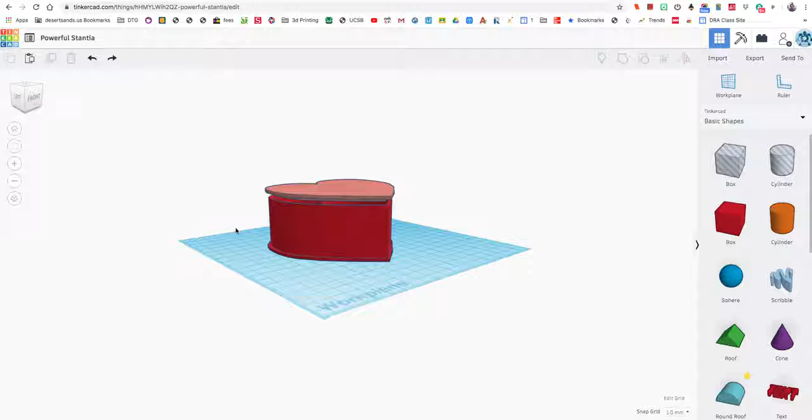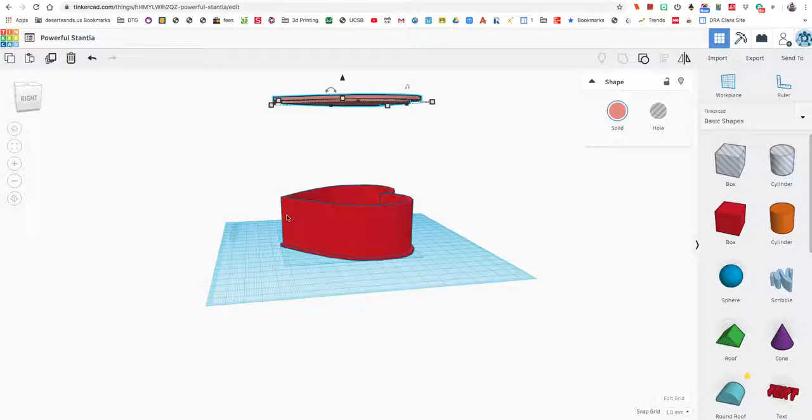This is going to be an advanced tutorial, so get ready to get your mind blown. This is advanced, don't even try it, you might start crying. But for those brave enough, here's what we're going to do: we're going to cut this box at an angle and then angle the lid as well, so the box at the end is still a box, but more interesting than just going straight up. You'll see what I mean in a bit. But to do this requires understanding negative space and angles.

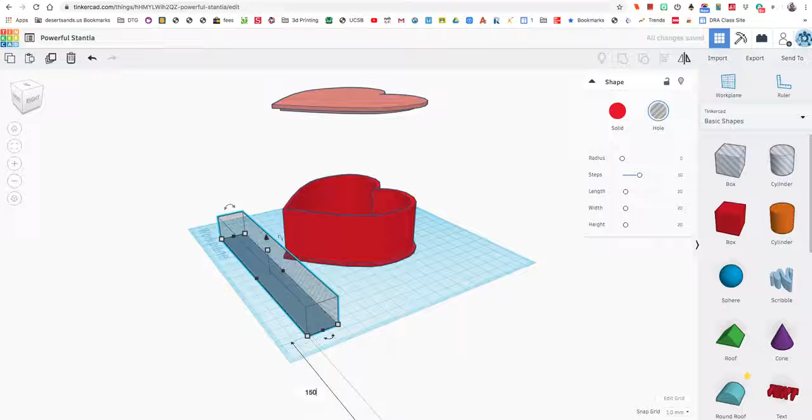First thing I'm going to do is change this to about 150 by 150. And why so much? Because I wanted to cover the spacing, yet it didn't work — I went wrong. I'm going to click here for 150. All right, and then this one, let's just go about 50.

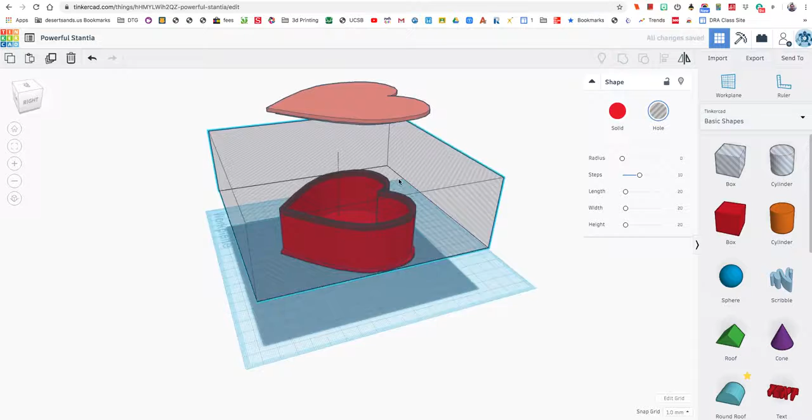So what I want to do is create an angle here. I'm going to do that by raising this, let's say here. And I'm going to move the lid over here to the right. Here's where it gets tricky.

You click on this, and this is what I want to play with, because this is going to tilt it left and right. So if you're looking at it this way, you're barely going to see this. You want to make sure you're looking at the side of the box. Now I'm going to zoom out a little so I can show you what I'm talking about.

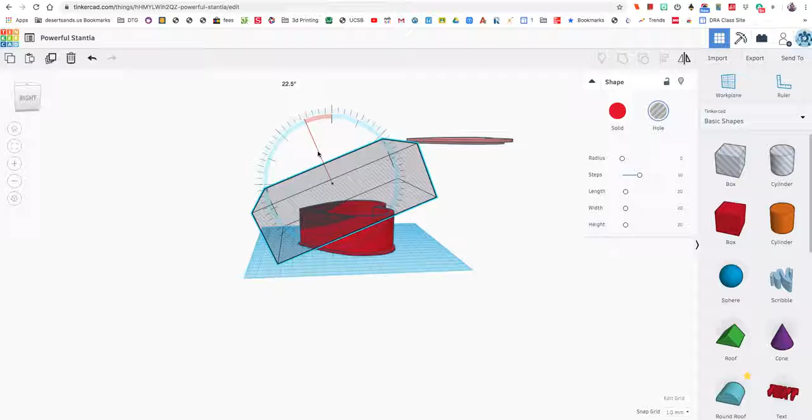Now if I just move this over, it goes 22.5 degrees — not exactly what I'm looking for in terms of the angle. See how it just cuts part of it off? And if I move it back a little, yeah, the box goes right about there. I don't like the angle. Let's just keep it there.

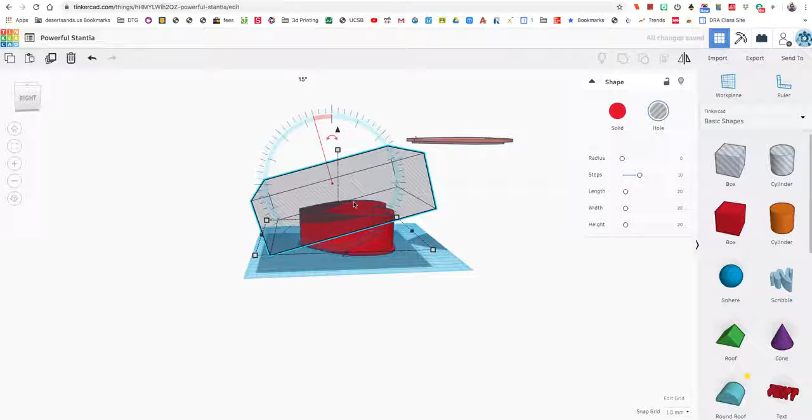So what I'm going to do is change this by putting 15. And why 15 degrees? Because I was playing with this earlier and I liked the way 15 degrees looked here. So I'm going to go with 15.

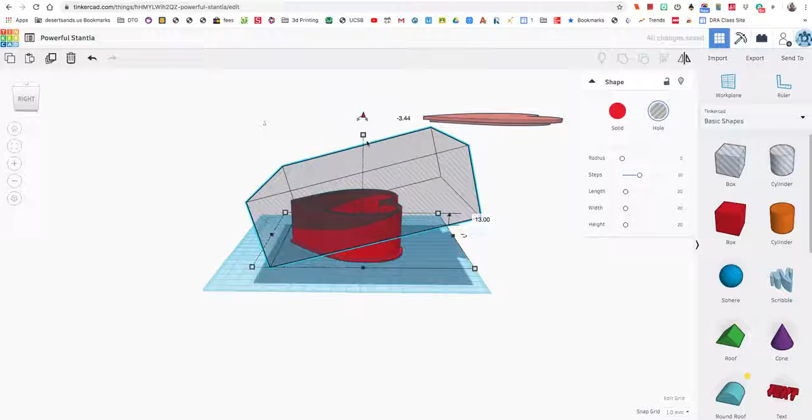At this point it's not going all the way back. Let me show you what I'm talking about. I want this gray area to be right here, because that's what's going to get erased. So to make sure I get that, I'm going to lower this just a little bit more. And there — now I have the very back of the box at an angle and the front of the box at an angle. Okay, so there you go.

It looks good. I'm going to just move this over here. Again, everything looks good — it's going to cut the top layer. Before I group these two, here's what I'm going to do.

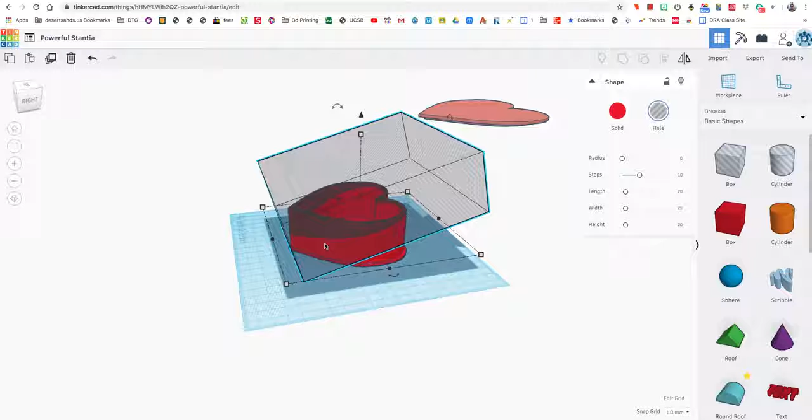I'm going to create a duplicate of the box, and then just move this over a little bit over here. Okay, I'm going to group these two. And now I have this slightly cooler version of the same box.

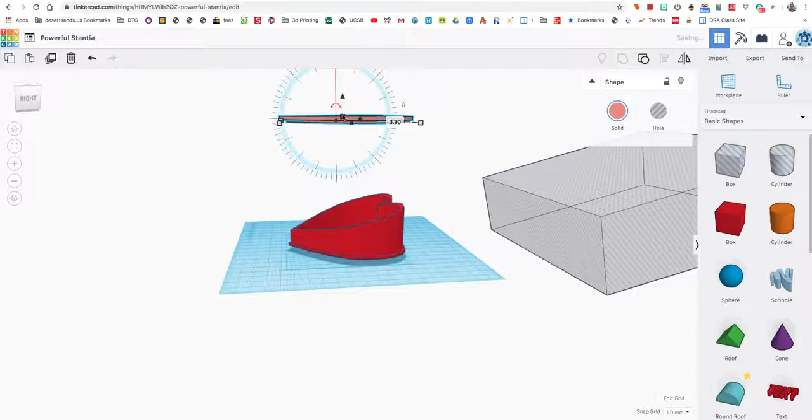Now here's the next part, and this is the part that confuses some people. Right now the lid is in two parts. I could just click on that, change that to 15, and there you go. But can anyone see what the problem is going to be when I do this?

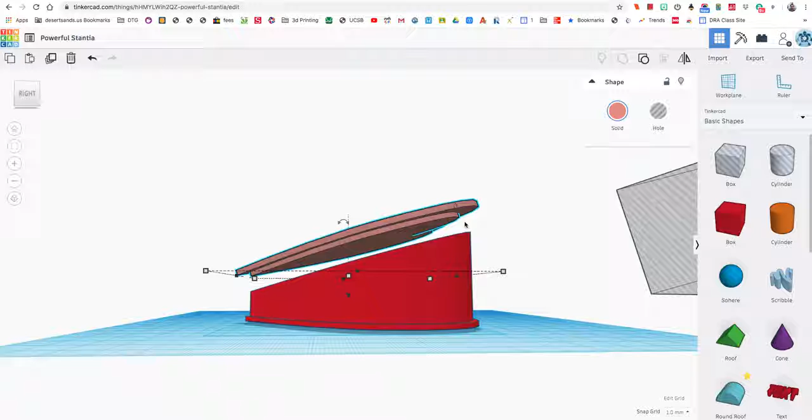It's really hard to see, but if you notice, this bottom part is going at an angle as well as this one, which means it may not close correctly. So what I want to do is guarantee that it closes correctly by making sure this angle here is going straight down.

And this is the part that makes it a little more difficult, a little more advanced. So let's move this back up. The first thing I'm going to do is separate this, so I'm going to ungroup. There it is, and the bottom is red and the top is pinkish.

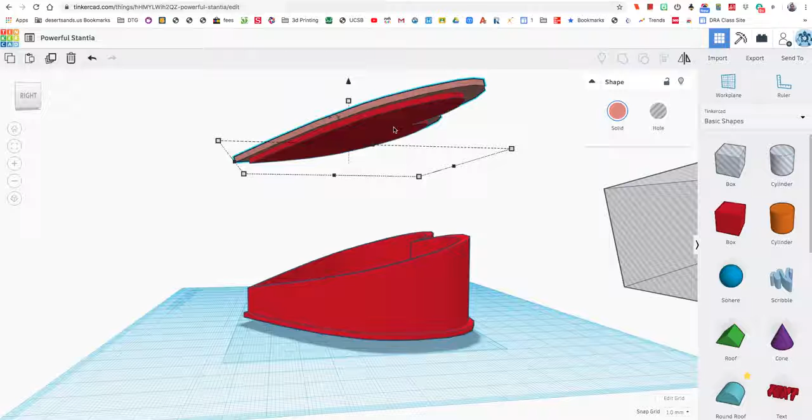That's fine. Okay, well what happened over here? Let me go back, let me Control Z. Okay, I'm going to move this over here. This top part, I'm going to move out of the way.

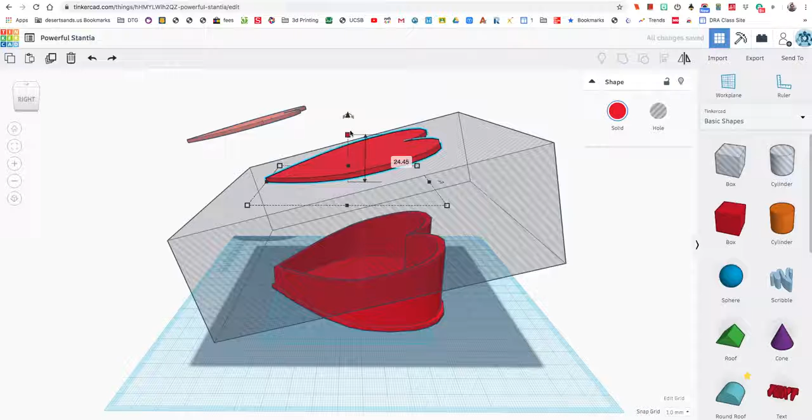Drop down. Okay, if I look at it from this angle, I can do this. Oh wait, sorry, I forgot. Let me change this back to where I wanted it to be, which is -15, so it can be flat again. I guess that would be +30 and 15. There, flat again. And this one, let me make that flat again too, 15, okay, we're good.

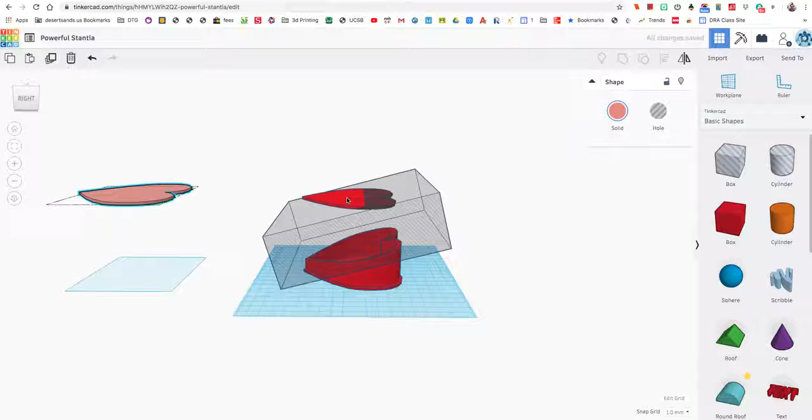So this is getting in my way. I'm gonna move this up a little bit, and here's what I wanna do: I wanna create a chunk out of this that goes straight down. So there's one chunk.

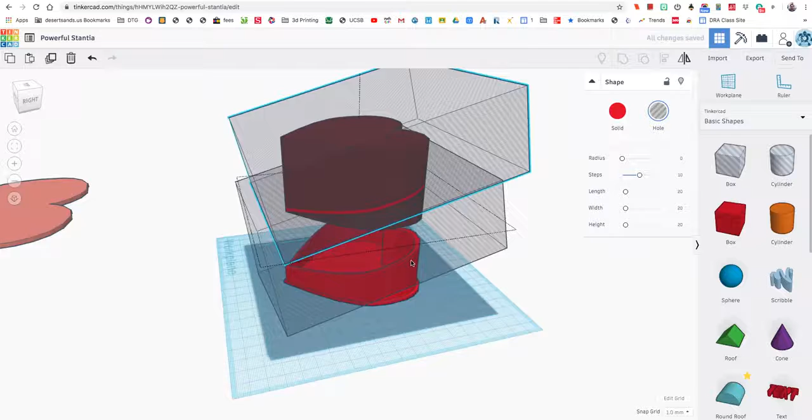And I wanna create another block. There it is, I'll move this one right there. And I'm just gonna move that up. You see how it's creating a little bit of a heart, but the thing is it's going straight down. So now I'm going to group these two right here.

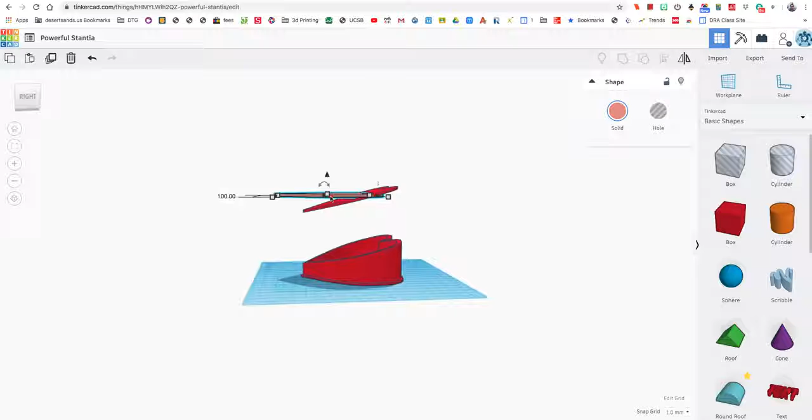And now I have that heart and it's going straight down, whereas this one's going to also turn. Let me look at it from the other side. That way I can just click on this, turn it to 15 if I remember correctly, and this should overlay over that heart easily. Unfortunately, I can't see that well, so I'm going to get closer.

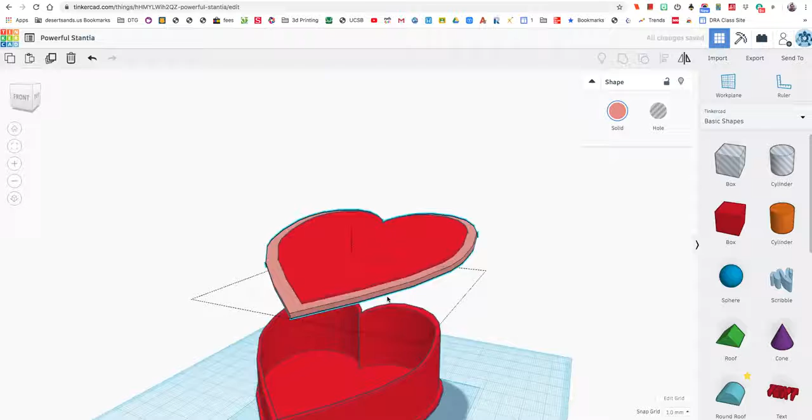Okay, looks like I may have to move it down a little bit, but let me see. Is that centered enough? No, I'm going to move this over here a little bit and then up and over. There, I like that. So now I'm going to move the bottom layer up. I could have moved the inside layer down, but it didn't really make a difference.

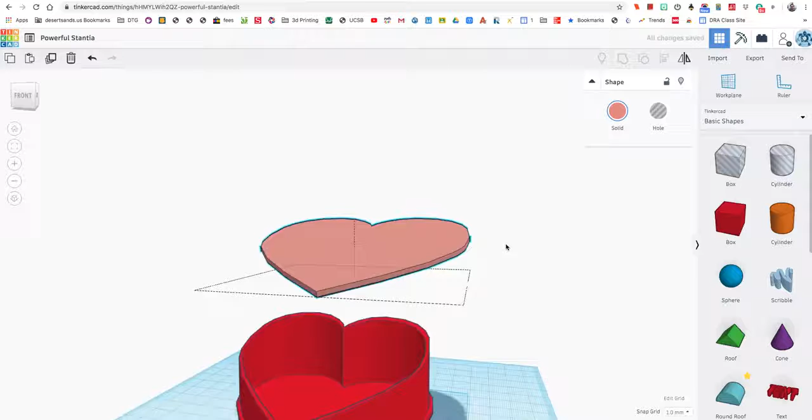Okay, so now I have this. This is going straight down. I wonder if I can get a close-up so you can see the difference of what I wanted to do. That's what I'm talking about. See how this, technically, is going straight down, and this one's going at an angle this way, straight down at an angle. And that's what I wanted to achieve, to keep that lid in place when making this heart.

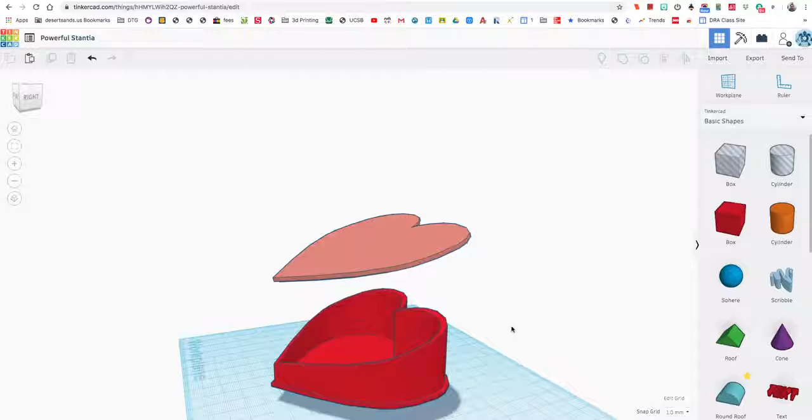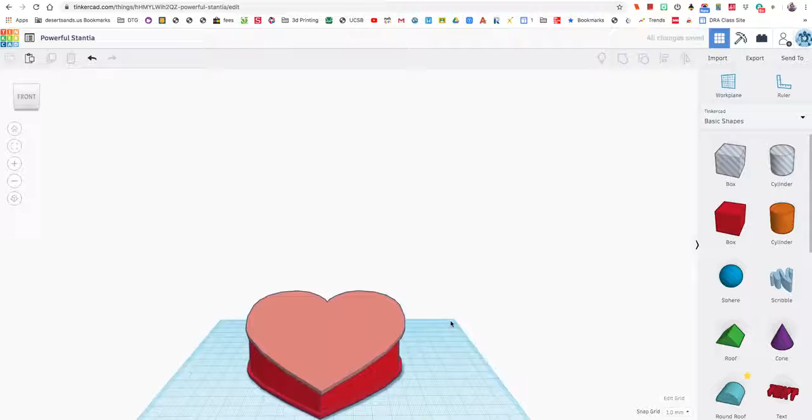So now, last step, I'm going to group the two. And there it is. I'm going to move this straight down just so you can see what the heart looks like now. Now, when you print this, the heart on top, the lid, will stay in place even after you close it, but it'll be at an angle. And again, you can always decorate the top part with a name, anything, a heart, another heart, doesn't matter.

But now it is no longer just a regular box, it is tilted a little bit, slanted, but it's much cooler.